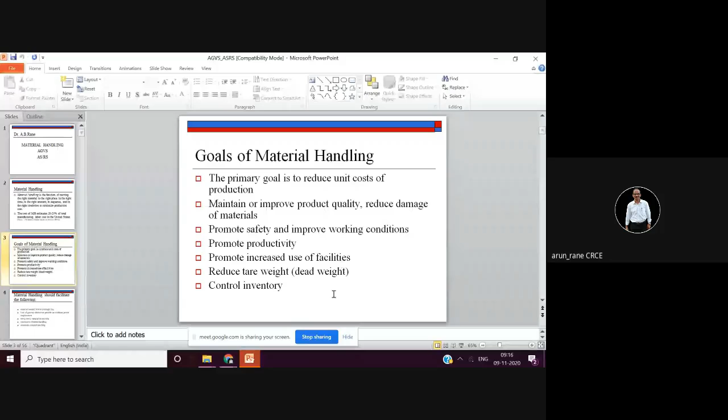So, what are the objectives of material handling? One is to reduce, of course, the cost of production. To improve the product quality, and your material should not be damaged while handling. Safety and working conditions, that is most important. Then obviously the inventory has to be controlled. And the dead weight has to be reduced. Then material should facilitate flow in a straight line wherever possible.

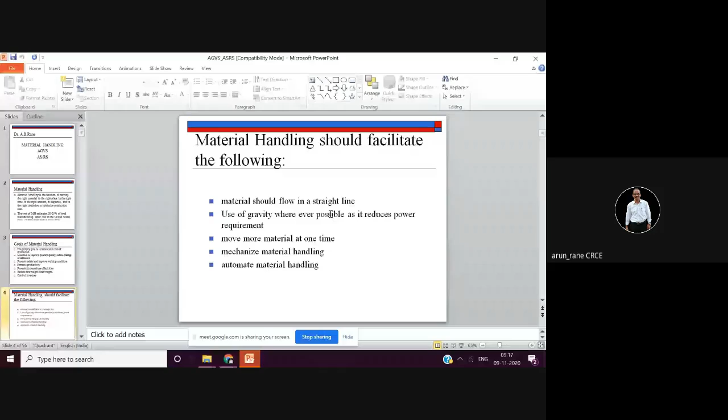See, most of the type of question that is asked is, what are the objectives of material handling, or different modes of material handling, or what are the design considerations of material handling. So questions like that can be asked, or have been asked. Then it should move more material at a time, and there has to be mechanization or automation of the material handling, that is, it should be unmanned.

So what does it include? It includes your transport equipment. So what are the different material handling equipments? You have industrial trucks, also called forklift trucks. Then automated guided vehicles, that is AGVs. These are similar to your trams and monorails, and conveyors, then different types of cranes and hoists.

Then how to store? You can store in bulk. You can store on the rack. You can store in bins. You can store in drawers. Then what are the different equipment that can be utilized? Palletizers. Palletizers are nothing but small pallets, which are also used conveniently for material handling.

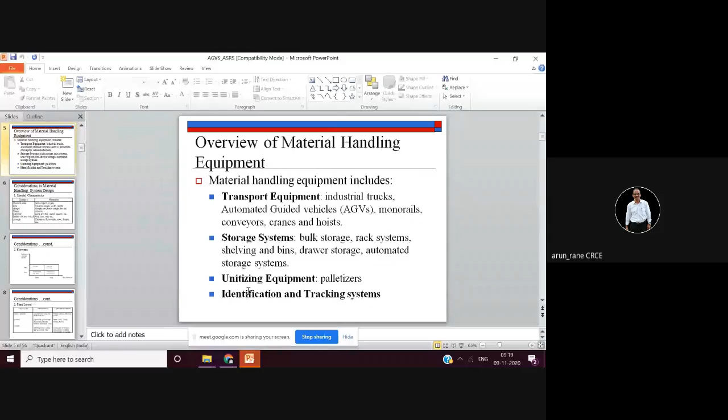Then once you have the material handling system, you should have a proper identification and tracking system. And that is nothing but your AS/RS, automatic storage and retrieval system, because if there is a requirement, you should be able to retrieve immediately, within a maximum index time of 3 minutes, as I told earlier.

So these are the considerations in material handling system design. That is, what state the material is in, whether it is solid. I have always been giving the example of a vehicle assembly line or furniture assembly line, your locks. So those are solids. Liquids and gases means your chemical industries, industrial chemicals and fertilizers. Gas is nothing but your ONGC, BPCL. So if the state is different, your material handling techniques will also differ.

And what is the size? You have to consider the length, width, and height of the product. What is the weight of each product? What is the shape? Whether it is perfectly rectangular or odd shaped, like vehicles. Then what the condition is, whether it is in the form of long round bars, billets, long continuously flowing billets.

Then this is the most important: whether it is in hot condition, cold condition, or wet condition. Hot condition means like you have rolling mills, that is wire rolling mills. For example, Tata SSL, that is Special Steel Limited. There it's a wire rolling plant. Or Mukand Steel Company Limited. There it is billets in the hot condition which come out.

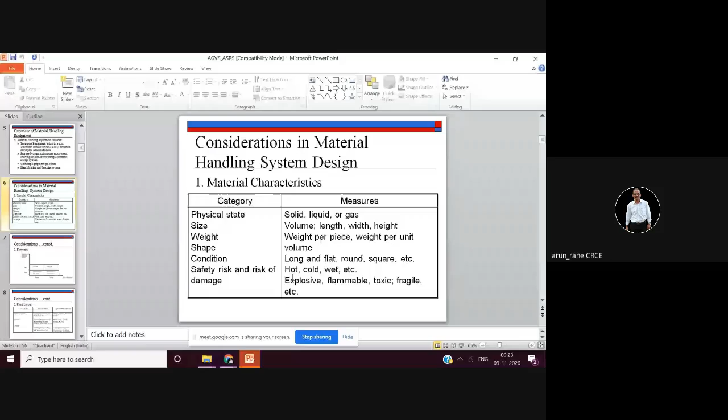Then this damage, if it is explosive, flammable, toxic, fragile, then again your material handling system varies. Another consideration is your distance and your flow rate. What is the flow rate and what is the distance?

Like say, gas which is coming from Uran, ONGC plants to the BPCL or various outlets in the Hindustan Petroleum or Bharat Petroleum, which are at Vadala, which are at Vashi. So how that is to be handled? That has to be handled through the pipelines. You may be knowing these pipelines. Even in our societies also, gas flows in the pipelines, but those pipelines are small, whereas the ONGC pipelines are quite big. So again, that has to be considered.

So whether the distance is long, and this is a graph: the longer distance, and if the quantity is less, then you have to go for the AGV. If the distance is long and the quantity is also high, then you have to go for the conveyors. If the distance is short and quantity is high, then again you go for automatic conveyors. If the distance is short and quantity is less, it can be handled easily by labor, that is manual handling, or just by hand trucks.

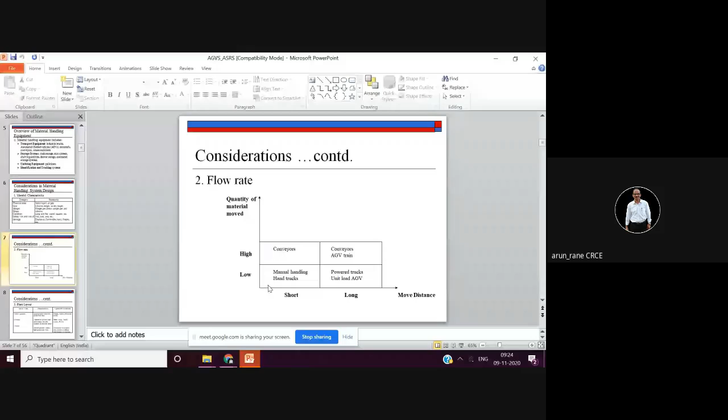Third consideration for material handling is plant layout. This is important. Earlier it used to be asked for 10 marks, now it may not be asked for 10 marks, but definitely for 4 to 5 marks it can be asked. So the first was material characteristics, the second consideration was your flow rate, and third is your plant layout.

I don't know. Some students are saying that not join.

So there are various types of plant layouts. You have fixed position layout, process layout, product layout. So how is its impact on material handling? Suppose if it is a process layout, the layout is as per the processes, like turning, heat treatment, gear cutting, milling. So all the processes are grouped together. What are the characteristics of the process layout? There is a variation in the product and processing. Production rates are low and medium. So here the material handling equipment will be hand trucks, forklift trucks and automated guided vehicles.

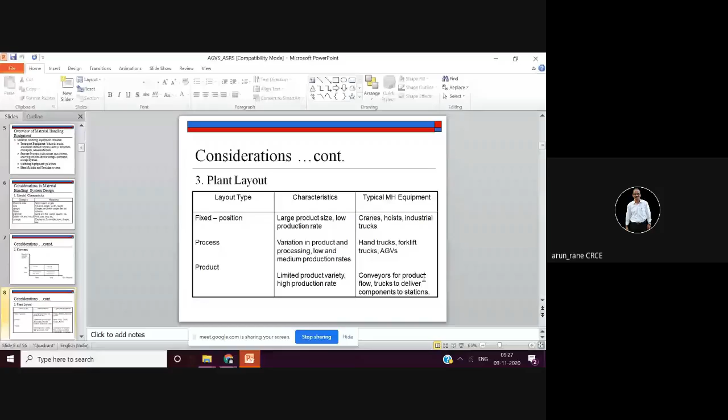Then if it is a product type of layout, where the product variety is limited but the production rate is high, that is mass production, then we go for conveyors for the product flow, and trucks to deliver components to the different stations. Stations means workstations.

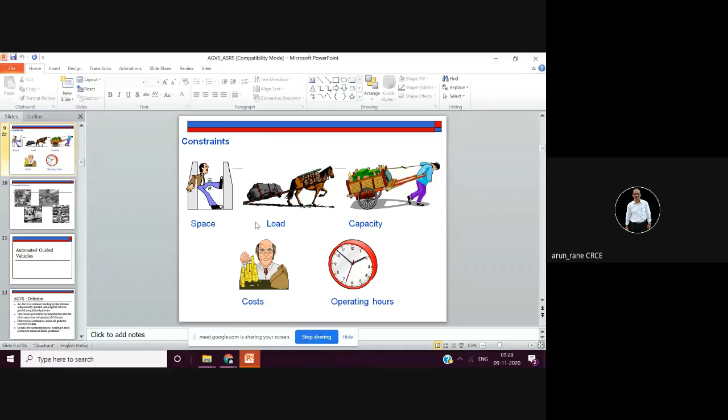You need to see the constraints here. What are the constraints? The space. Depending upon the space, you have to decide upon your material handling, whether you are going to go for vertical. Then load. What is the total load? Depending upon the load, you have to decide upon the equipment capacity. What is the capacity of a person? How much can he take? Only that much has to be loaded.

Usually for a human being, 5 kg is the capacity. No doubt a bodybuilder can lift 15 kg or 20 kg, but he cannot lift that 15 or 20 kg and walk. You cannot take 15 kg in your haversack, come to the college and go back home. Usually the capacity is 5 kg. Cost and hours.

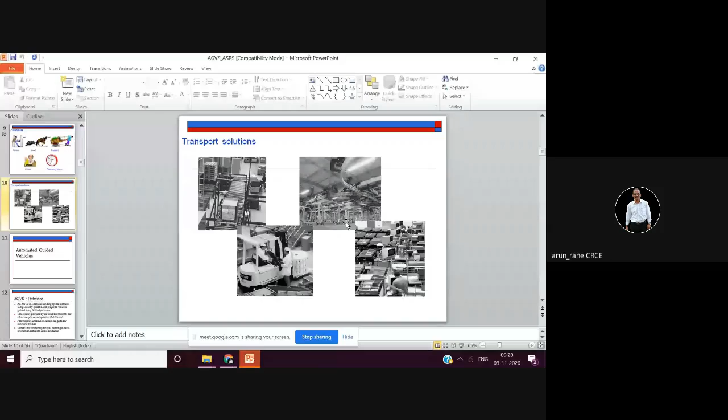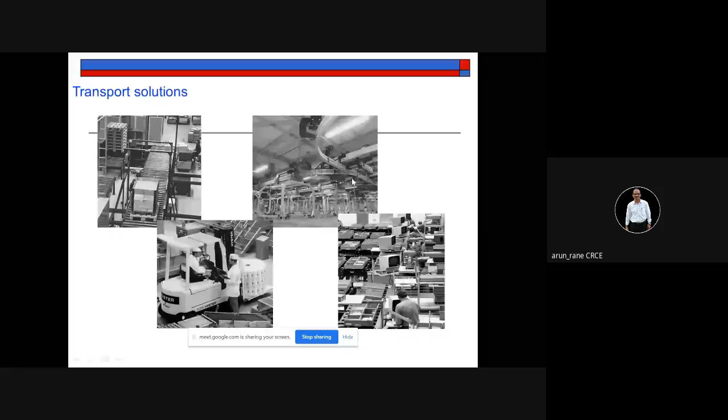So these are the different solutions. You have a roller conveyor here, on which this prismatic component is being transported. These are your overhead conveyors. I'll zoom it, maybe it will be visible. So these are your overhead conveyors. You have hangers attached to this, and to the hangers your products are attached.

Then these are called the AGVs, no, sorry, these are your industrial trucks. Automated guided vehicles are unmanned. These are your trucks which are driven manually, so a person is required. And these are your small pallet trucks, palletizers.

AGV again can be used separately or has been used many times. Automated guided vehicles. So the definition of AGV: it's a material handling system that uses independently operated, self-propelled, means unmanned, vehicles along defined pathways. Like you have guided ways, pathways, fixed ways, which are programmed.

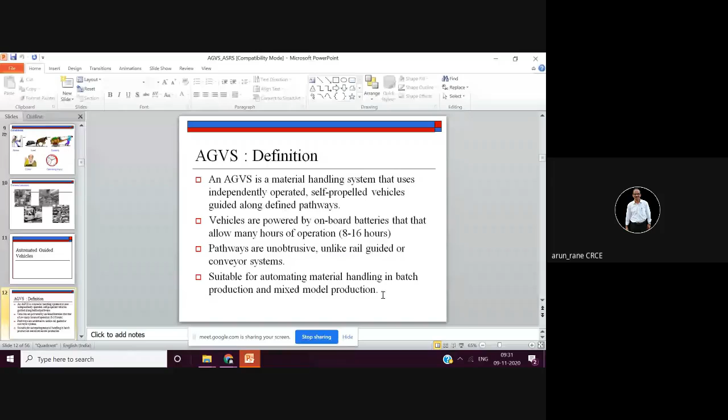These are basically battery driven, because if it is electrically driven, then you need a long wire, which may cause an accident. So most of the times it is battery driven. Then it should be unobstructive. There should not be any obstacles. It is suitable for automatic material handling in batch production and in mixed model production. Nowadays the production is mixed model.

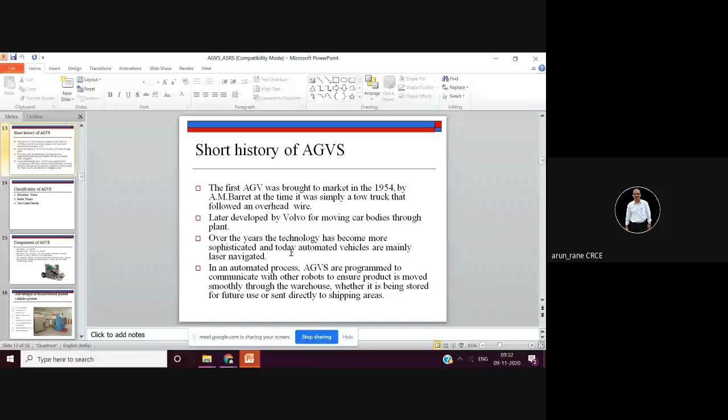This is the history, which is not that important. Earlier it was brought by Barret. Then it was developed by Volvo. Volvo is the most reputed heavy vehicles manufacturing company. Then, as the technology was sophisticated, AGVs also were developed, and slowly it was programmed also to communicate with the other robots, that is, with the other material handling systems. So, how do you classify the AGVs? It can be driverless trains, then pallet trucks, and unit load carriers.

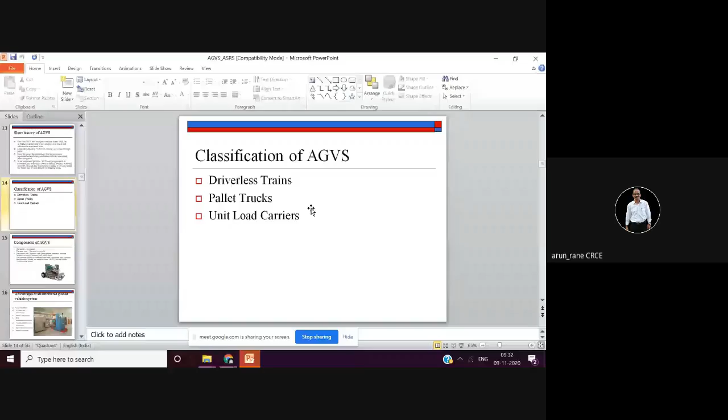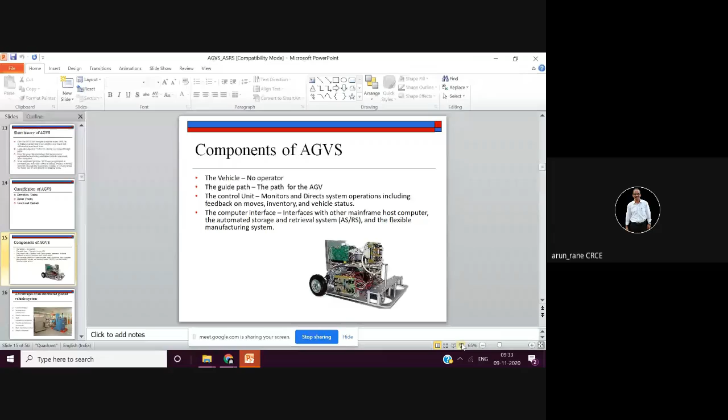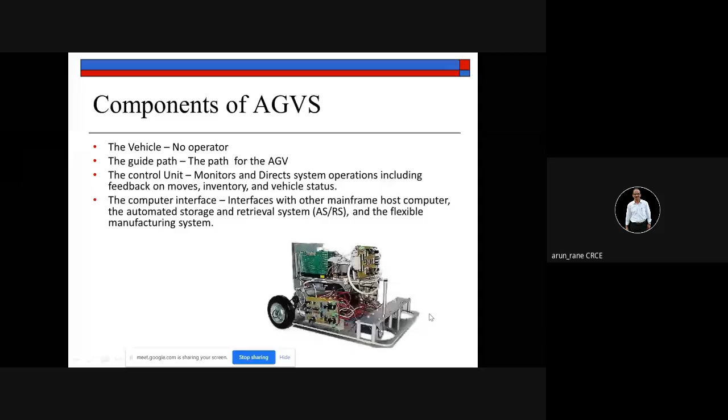So, a typical AGV will look like this. The covers have been removed in order to show what is there inside. So there is no operator and it moves along the guided path. The control unit monitors and directs the system operation. It is interfaced with the computer so that you get timely reports, as well as it is useful for your automatic storage and retrieval system. This is the main part of your FMS, that is flexible manufacturing system. This is how an automated guided vehicle system will look like.

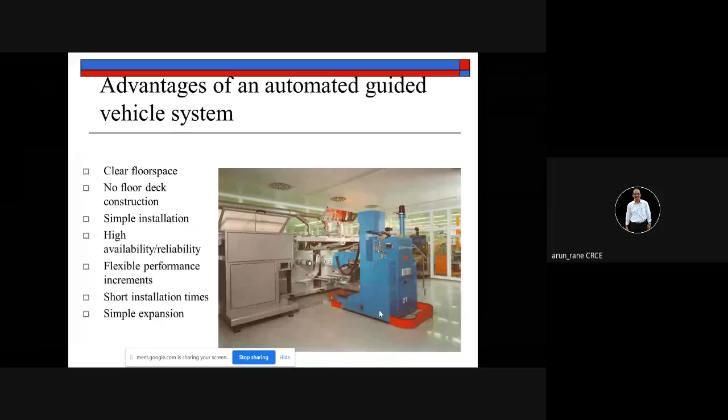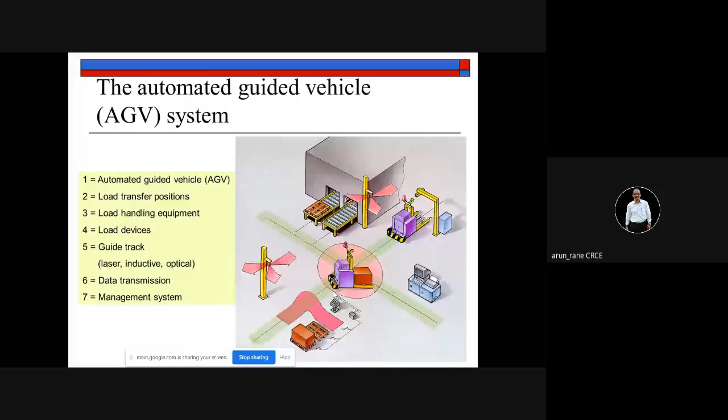So these are the different parts of the automated guided vehicle systems. This is your AGV at the center. Then you have load transfer positions. Then you have handling equipment. Then you have loading devices. Then you have tracks. And of course, the most important is your data transmissions and your management systems.

So, what are the functions of the AGVs? These are the vehicle functions. These are the travel controls, that is speed. Then always the safety gap has to be maintained, and there has to be some provision for collision protection. Then how to find out the route. Then data exchange. There are only two modes. This is important. One is infrared and another is RFID, that is radio frequency.

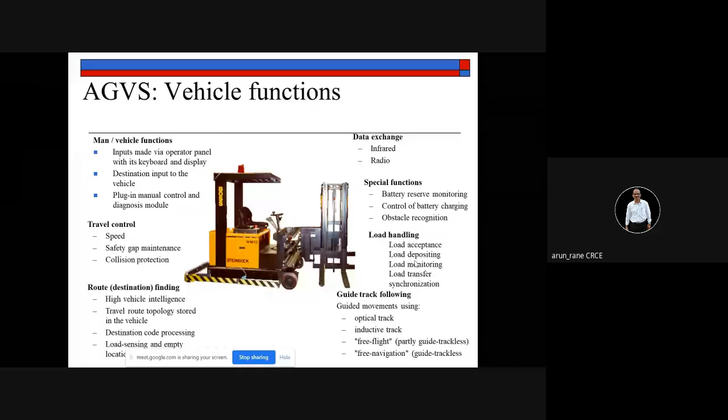Then other functions include your battery life or battery reserves, that is when to go for the charging. Then it should be able to recognize the obstacle, load handling and guide track following. So load has to be accepted, then it has to be deposited, and then the track. The track can be optical track or it can be inductive track. Free flight means it is trackless, and free navigation is again trackless, but the entire guide is trackless. Here only part of the guide is trackless.

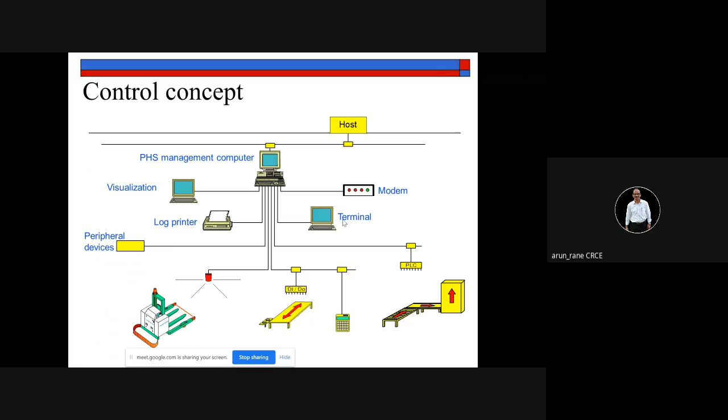This is what the total management system is. Control management systems. You have a host computer to control this AGV, and this is your workstation. You can get the output at the same time. You can also see it on the computer. So modern AGVs are computer controlled. Then it gives the position feedback. Communication: now most of the AGVs have RF communication, that is RFID.

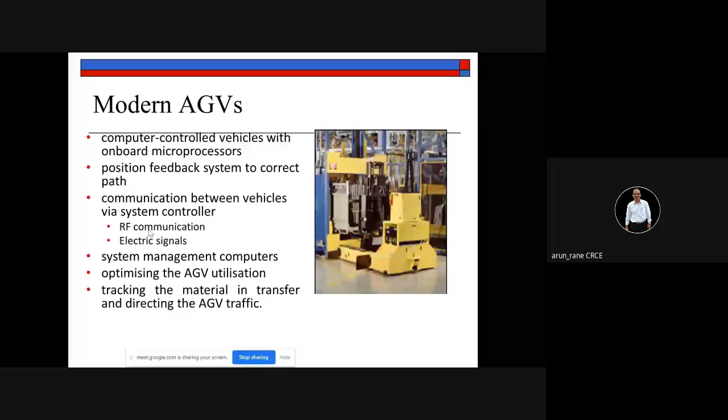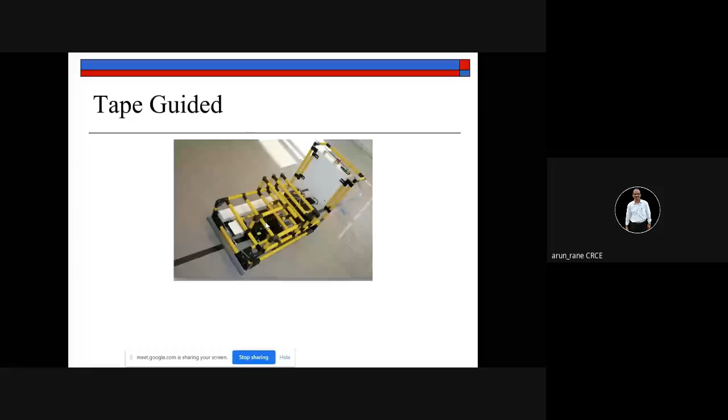How the guiding is. Now this is your guide, on which this is moving. So this is a tape guided system. So wherever this AGV has to be moved, the tape has to be there; wherever the tape is, on that only this AGV will move. Embedded guide wire means on the floor a channel, a groove, is cut, and in that the wires are installed.

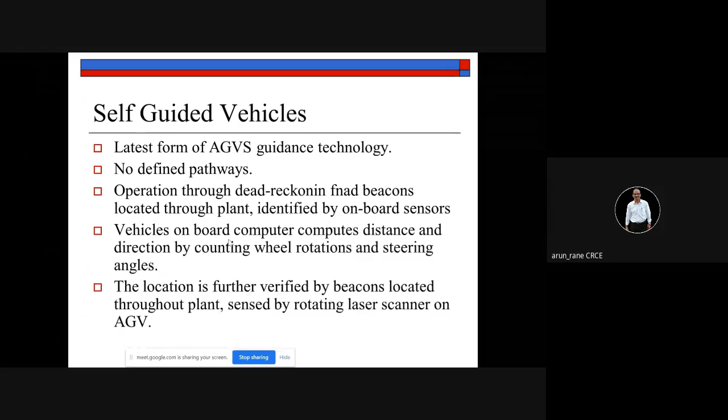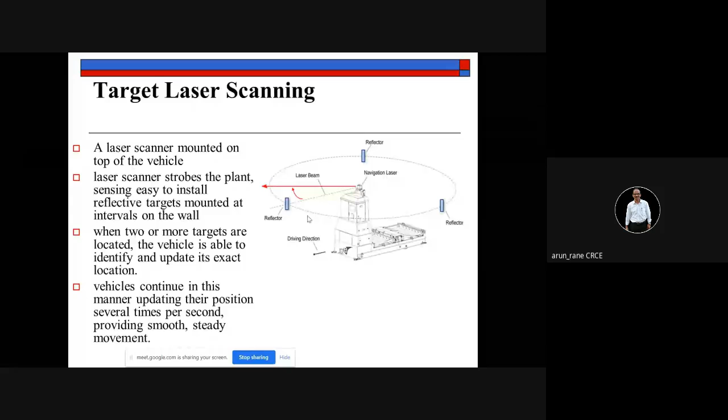Self-guided vehicles are becoming common now. These are the latest guided vehicles, and they don't have any defined pathways. So as per the directions received from the computers, it can move. And you have a rotating laser scanner for deciding the guideways. It's something called target laser scanning. That is where it has to reach, and then considering the obstacles with the sensing devices, the AGV decides its path.

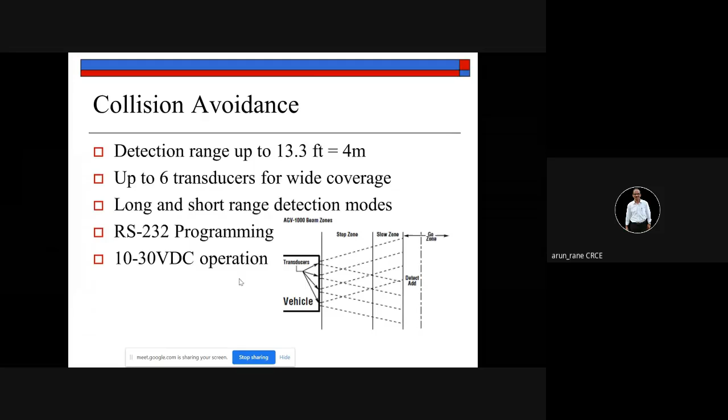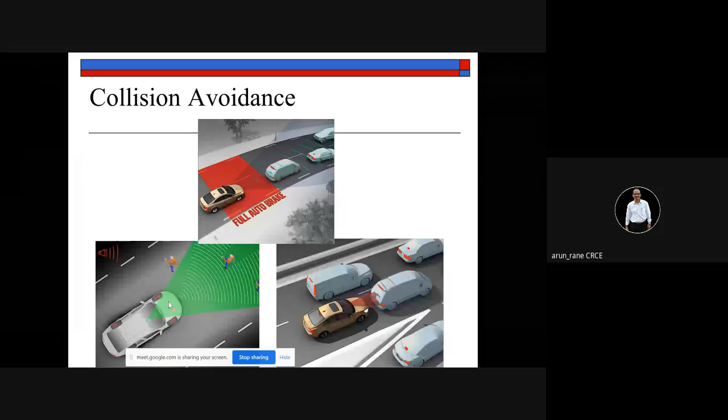See, your unmanned car, driverless or self-driving, is nothing but an AGV, automated guided vehicle. Like this, here again you have a collision device, so that it doesn't collide. You should have various safety devices like emergency stop, an obstacle sensor. This is a protective bar like a bumper, from all the sides. That is from the front, from the sides, and of course from behind also.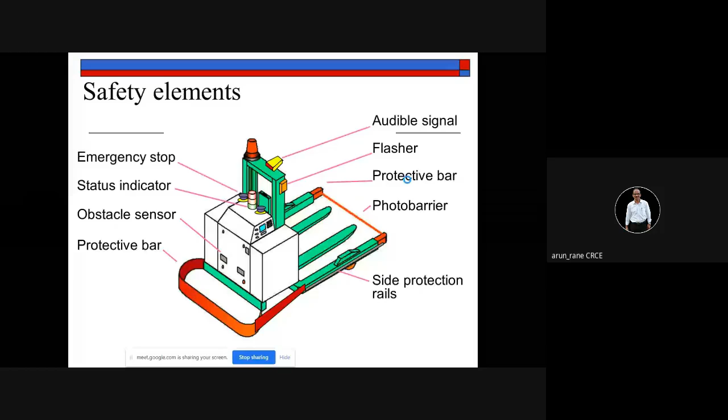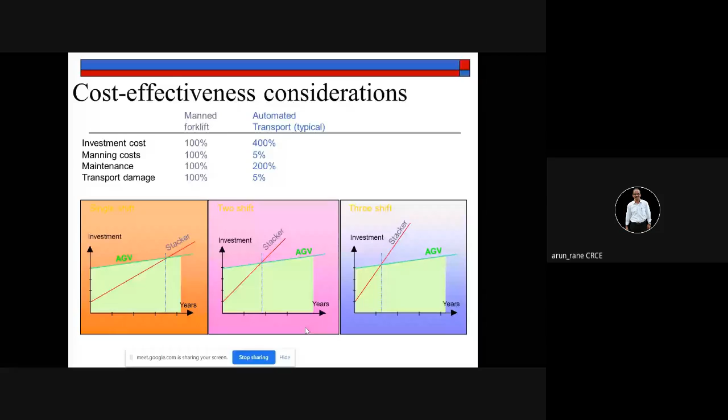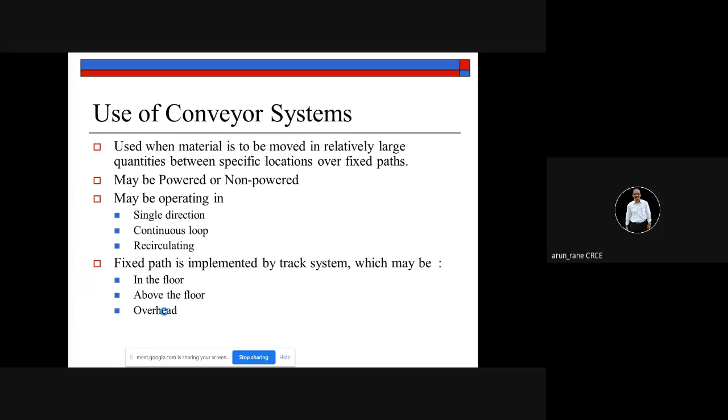Then lift. Many industries have goods lifts in which passengers are not allowed. It is not a passenger lift. It is only meant for the goods. Basically, it is heavy duty. So the speed is less. Whereas the passenger lift is not heavy duty. It can be around 1 ton or maybe around 600 or 700 kg. But the speed is the consideration.

High speed lifts, because you must be able to travel rapidly right from the ground floor to the 30-story building or 50-story building, whatever it is.

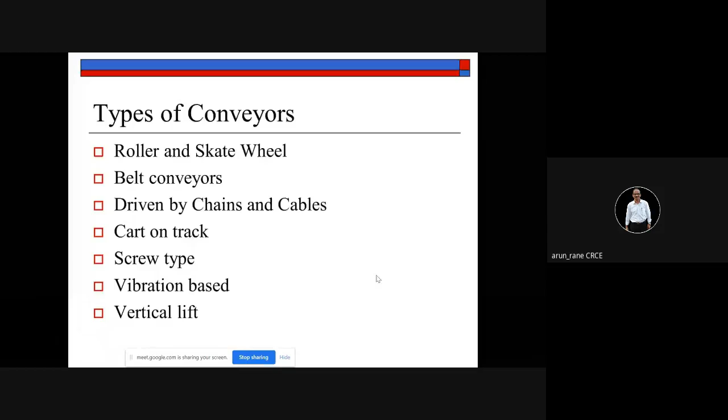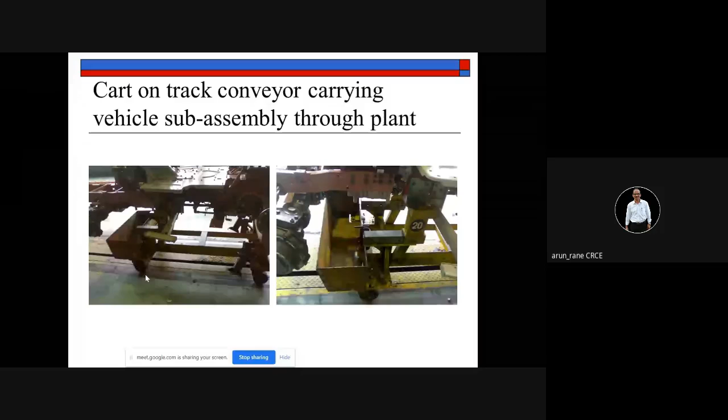Then you have something called the automatic storage and retrieval system. Again, there are two parts here, or rather I'll say three parts. One is your material handling system, how the question can be asked. Second, only on automated guided vehicles, and third can be only on automated storage and retrieval system. 5 marks. Not all, either. Maximum two.

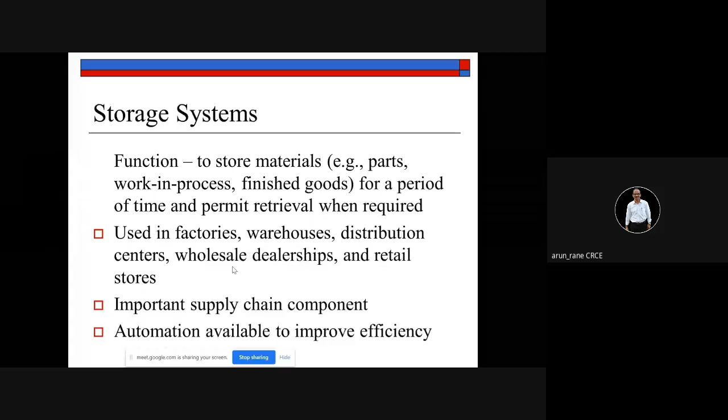So the first thing is that you should be able to store properly, and then you should be able to retrieve also. Retrieval is most important. So factories, warehouses, distribution. Not only this, but even in stores also this is used. Hardware stores. I'm talking about foreign countries. In foreign countries, even the laundry people also use this automatic storage and retrieval system.

Laundry people. So you give the clothes, they will wash it, and it goes to your storage system. Instead of nuts and bolts, there will be these trousers, clothes. So you go with your receipt, you just enter it in the computer, and the entire retrieval system will rotate and give the desired cloth.

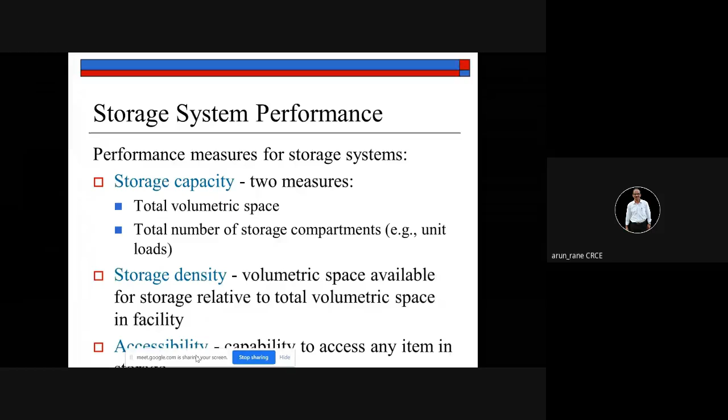So in storage system performance, what is important is capacity, that is, the total number of storage compartments, total space, and storage density. Accessibility is important. If it is not accessible, then it cannot be retrieved. So that is major.

It should always give you the stock, like when you go to the supermarket or to the mall, you just purchase something. Then the computer will subtract and give the fresh stock. Say out of 10 Parle-G, this customer has taken 6 Parle-G, so now only 4 Parle-G are remaining. So that is monitoring the stock.

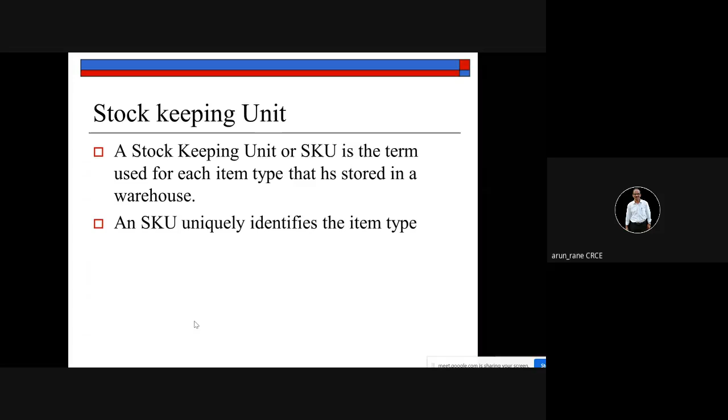So you have two strategies for the location. One is randomized and another is dedicated storage. Randomized is nothing but anyhow, and dedicated means properly stored.

In randomized storage, incoming items are stored in any available location. Wherever there's space, it's kept there. That is what randomized storage is.

So usually it is kept at the nearest available open location.

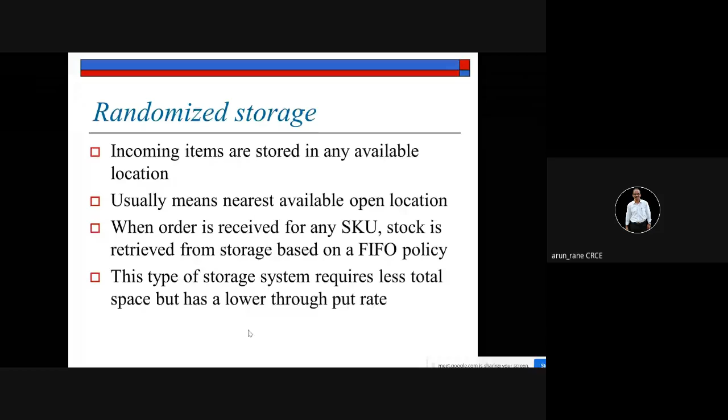Whenever you receive the order from the customer, then stock is retrieved from the storage based on FIFO policy, that is first in first out. So since it is kept anyhow, space required may be less.

In dedicated storage, you are assigned specific space locations. It's not mixed. So if you have huge space, if the storage space is more, then you can go for this type of storage. So that was your dedicated storage.

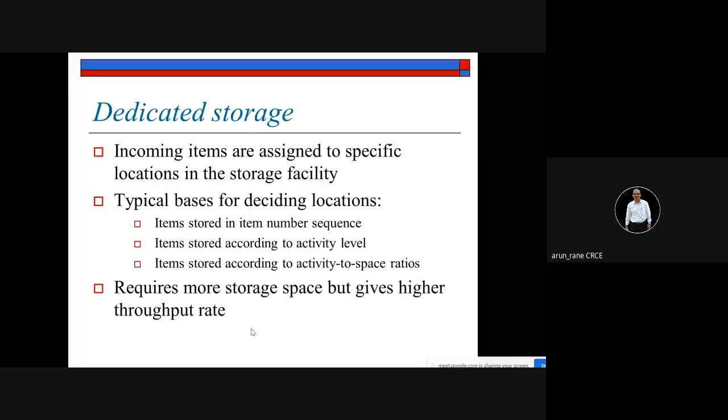This we have discussed many times, inventory level as a function of time, that is when to order, considering the safety stock and considering the lead time.

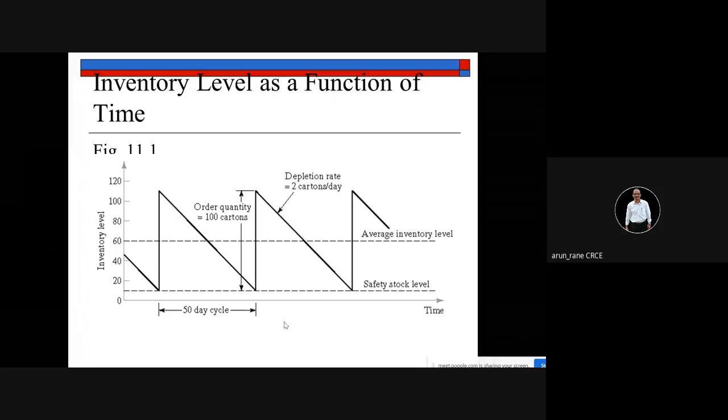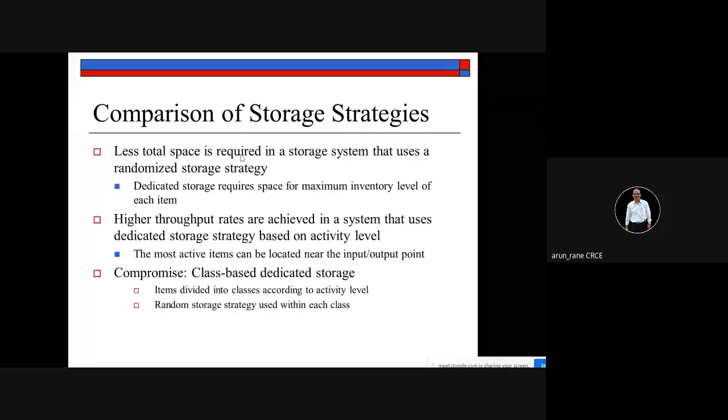Then you have to always see that the storage space which is required should be less. So sometimes randomized storage is given importance, at least in industries which are located in cities. That's why in small scale or medium scale industries, if you visit, you will find the material is kept anyhow because of the space constraints. But if you go and visit outskirts or the plants which are in the suburbs, it is well organized because of dedicated storage facility.

So what are the conventional storage methods? You have bulk storage, you have rack systems - these you are familiar with, racks. You have bins, you have shelves, and you have drawer storage.

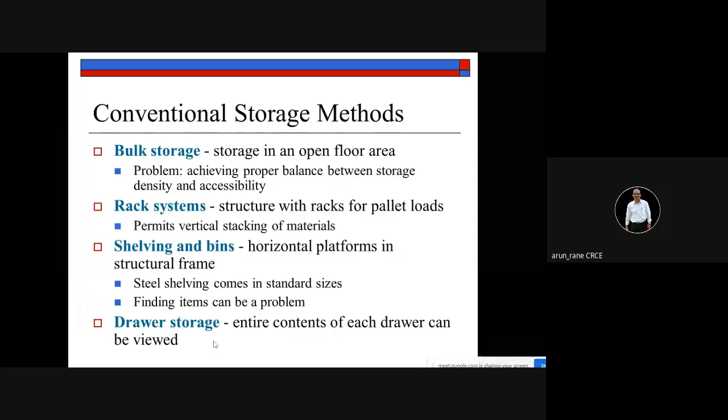Automatic storage means it is mechanized, stored automatically, but it needs a lot of money to be invested. So that's why only if you're going to get returns, then you go for an automated storage system.

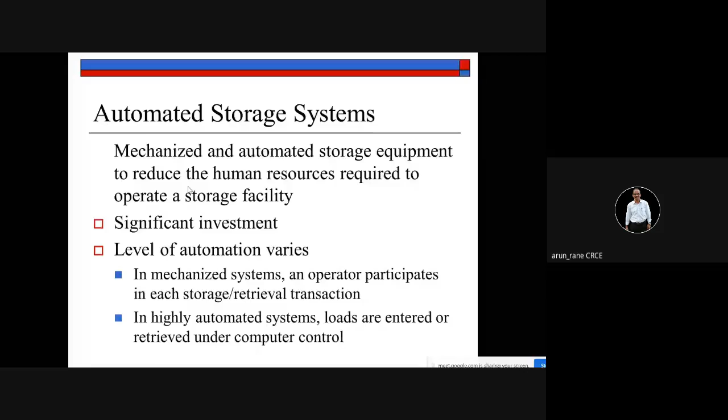Why go for automating? That is to increase the storage capacity. Most important is to reduce labor costs and increase productivity, and also to improve security and reduce pilferage, that is theft. Storage density can be improved, storage capacity can be improved, floor space can be used effectively. It is safe, you get good inventory control, and it improves the throughput, that is output.

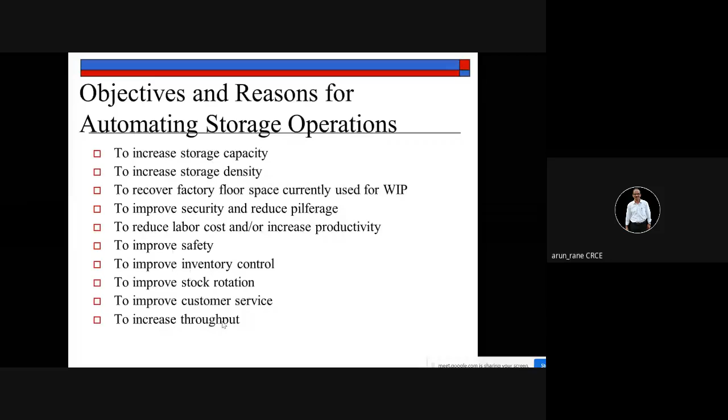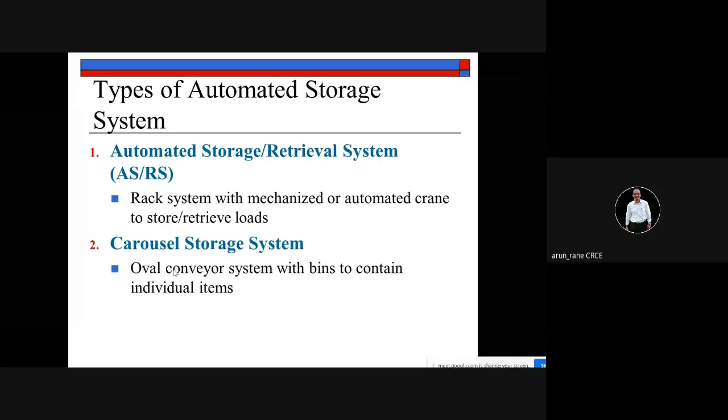So you have two types of automated storage systems, mostly common in automobile plants. One is ASRS and another is carousel storage system. ASRS is basically a rack type of system, and this is a carousel storage system. These are popularly used in Mahindra manufacturing plant, where they have a conveyor system with bins.

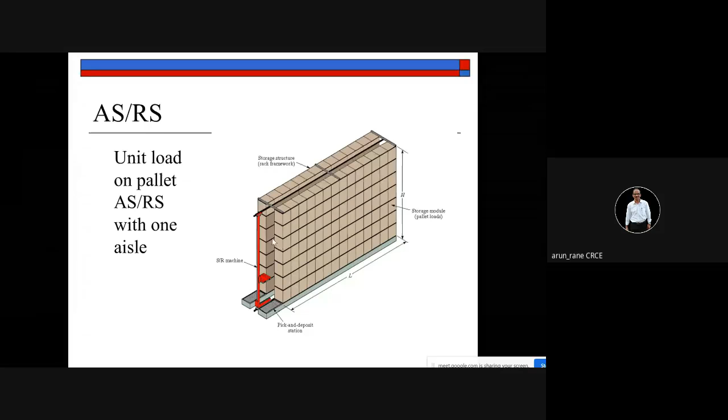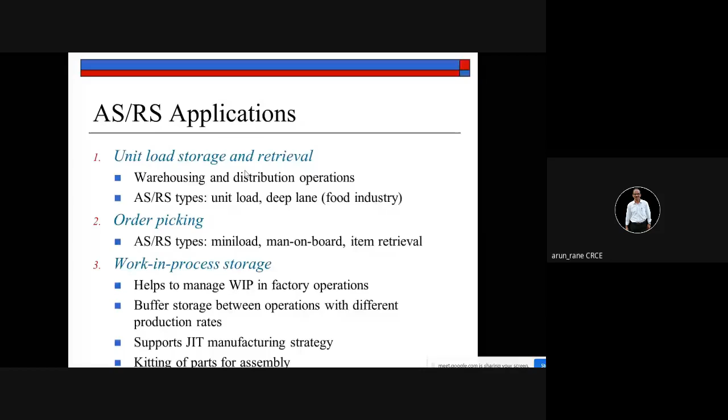These are the different uses.

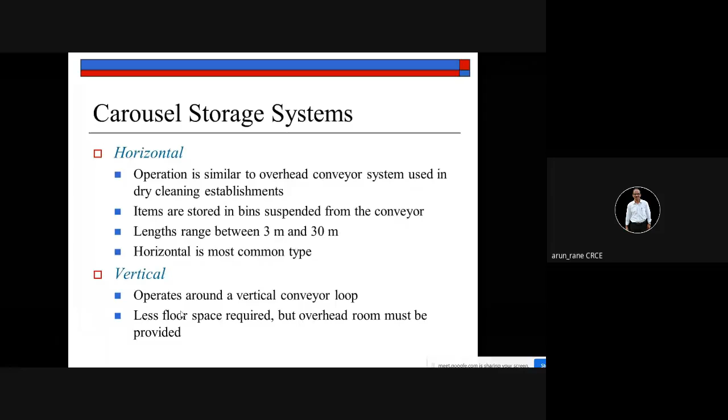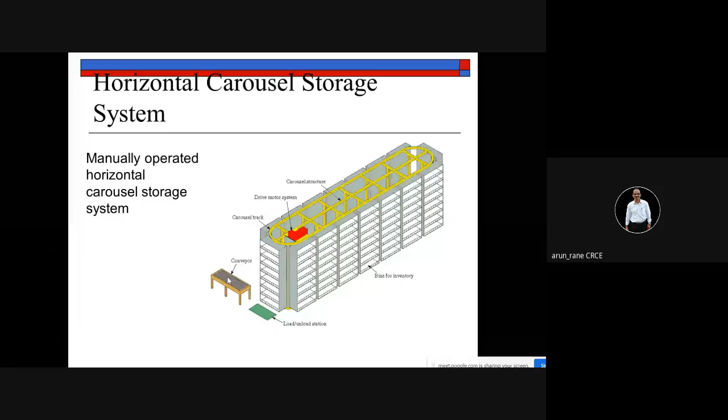So in vehicle manufacturing plants, you have horizontal carousel systems like this, and in shops like laundry shops, nut bolt shops, or hardware shops, vertical carousel storage systems are very popular because most of these shops have height available.

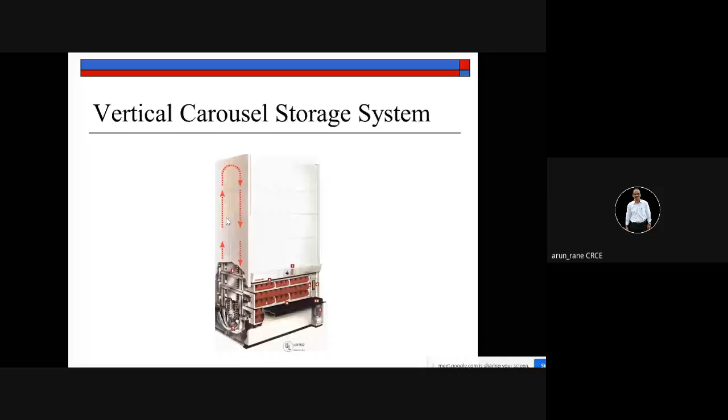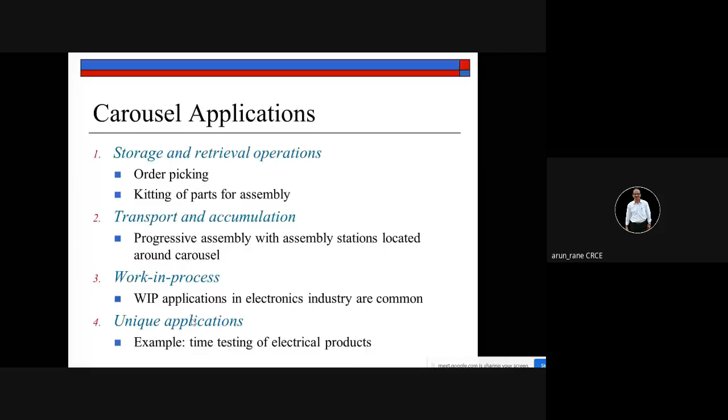So to summarize, questions on this topic can be divided into three parts. One is material handling - what are the different material handling systems and design considerations. Second is exclusively on AGV, and third is to describe the AS/RS system, automatic storage and retrieval system. So that's all.